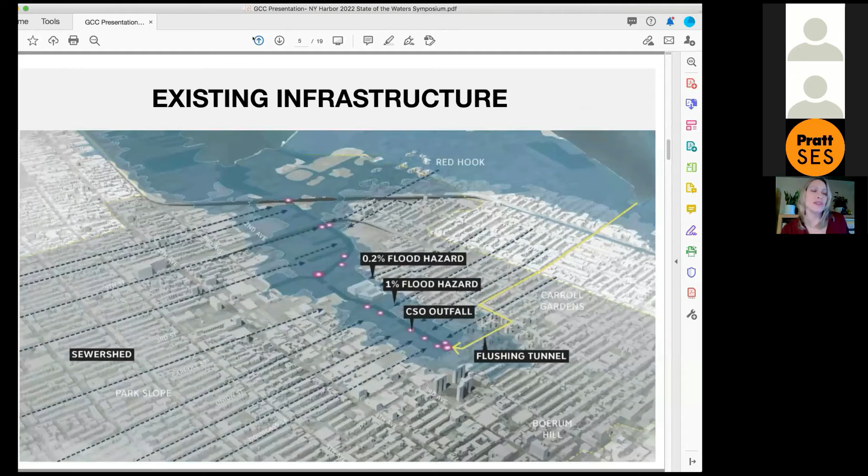Okay, can you see? There you go, yep, we see Gowanus Neighborhood Coalition. All right, I'll just show you these pictures. Darn, okay, this is what I was talking about. Here we are.

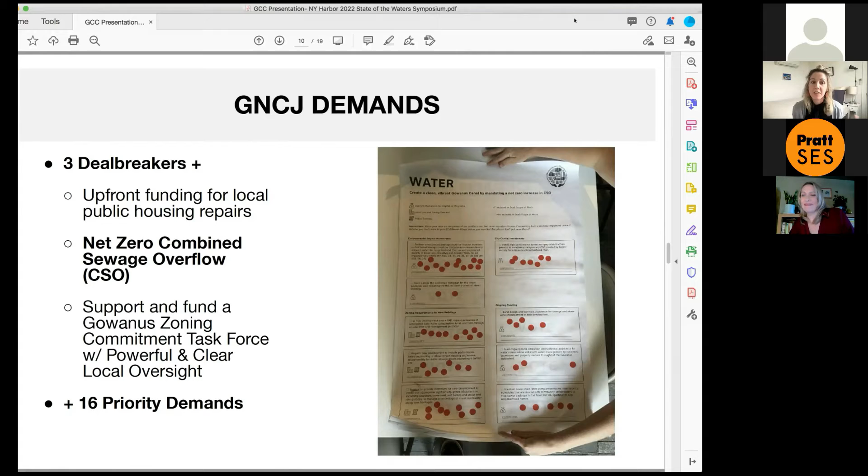All right, so what I was getting to is, through this work with the Gowanus Neighborhood Coalition for Justice, we worked to establish deal breakers as part of the rezoning process. There were 3 deal breakers listed here. Deal breaker number 2, no pun intended, was asking for a net zero CSO situation in the Gowanus Canal.

So at the time we started doing this outreach and advocating for this net zero CSO outcome with agencies, elected officials, and throughout the community, we had many conversations with DEP, who were working on the unified stormwater rule. This was very early in their process as they were establishing the rulemaking, and it became really clear that this rule had a lot of opportunities to help meet this goal of net zero CSO.

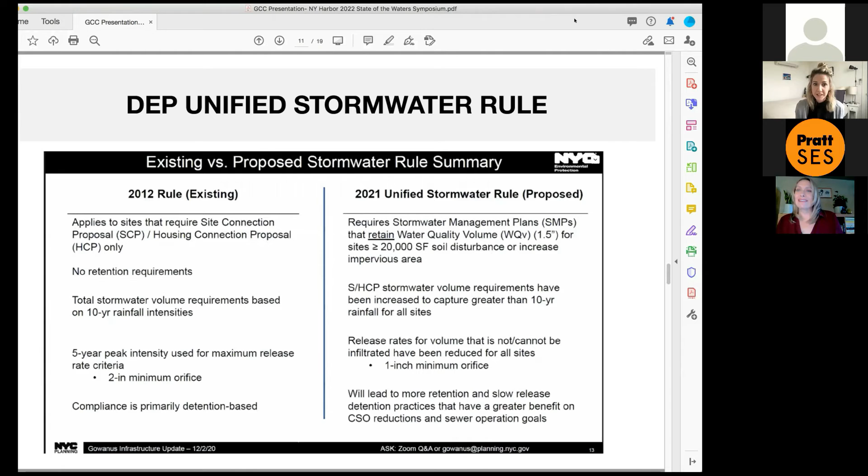Early on, DEP presented the differences between the 2012 performance standard and what the 2021 unified stormwater rule would do. Melissa did a great job covering this, but in a nutshell it's more stringent stormwater requirements, greater capture than the 10-year rainfall, slowing release rates, and an infiltration-first perspective that amounts to more green infrastructure. So we continued this advocacy since 2018 when the Gowanus framework was introduced, through this past November when the Gowanus rezoning was approved.

This involved lots of comments, public testimony, and outreach around net zero CSO. And what we wanted to see DEP do was show us what the unified stormwater rule would look like in Gowanus.

And we wanted this to be a part of the environmental impact statement for the rezoning process. We wanted DEP to report on a net zero CSO outcome, not just overall, but by each individual CSO outfall. So in the draft environmental impact statement, DEP did provide a robust response to our demand, going above and beyond the CEQR requirements, showing a better than net zero CSO outcome.

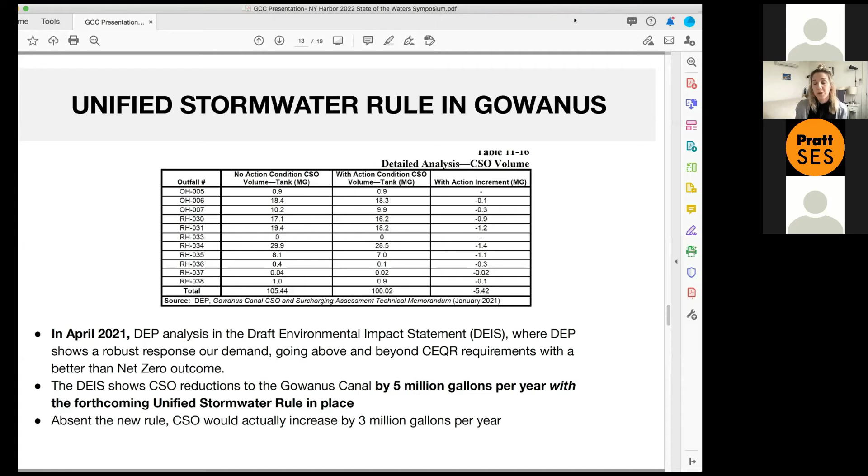Essentially about a 5 million gallon reduction in annual CSO volume. I think it's really important to note here that absent the new rule, with the former performance standard in place, CSO would have actually increased by about 3 million gallons a year. So this new rule is really going to help us achieve this goal.

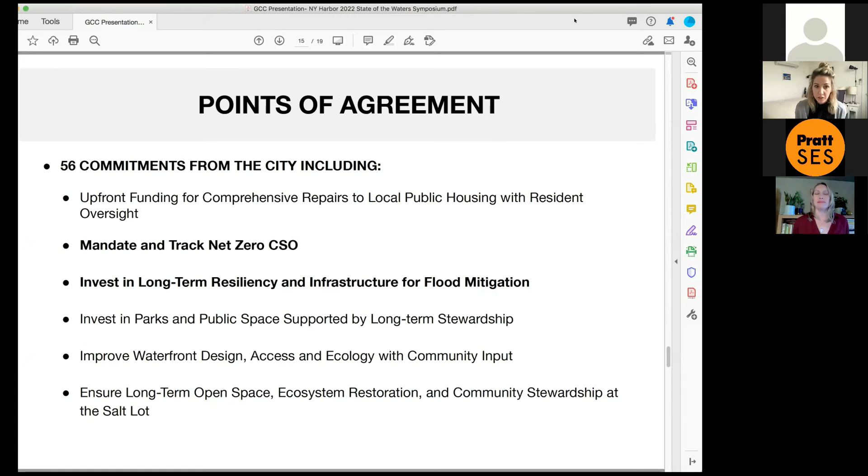So I just wanted to go over the advocacy wins and some of the really nuanced pieces that we think are important. The points of agreement is a document that was established as a consensus document for city commitments through this rezoning process. It includes 56 agreements, commitments from the city to do certain things that help us meet the resiliency and environmental justice goals for this rezoning. Many of them have to do with net zero CSO and long-term resiliency and infrastructure planning for the neighborhood.

Specific to the unified stormwater rule, that's going to help us achieve net zero through more stringent stormwater management requirements, ultimately resulting in a 5 million gallon reduction per year. The critical piece in the points of agreement that I want to note here is that DEP is going to be tracking and reporting on this new rule through both the Green Infrastructure Annual Report, but also in summary for the Gowanus Sewershed.

I think that is something we wanted to establish very early on in this process in order to really understand these modeling and all this complexity with every site development. We needed to sort of have a way of checking the incremental impacts.

Additionally, the infiltration-first hierarchy and the adaptive design standards are something that's really responsive to places like Gowanus, where you have a high water table and a history of contaminated soils. There's more flexibility and innovation inherent in the types of practices that can be applied.

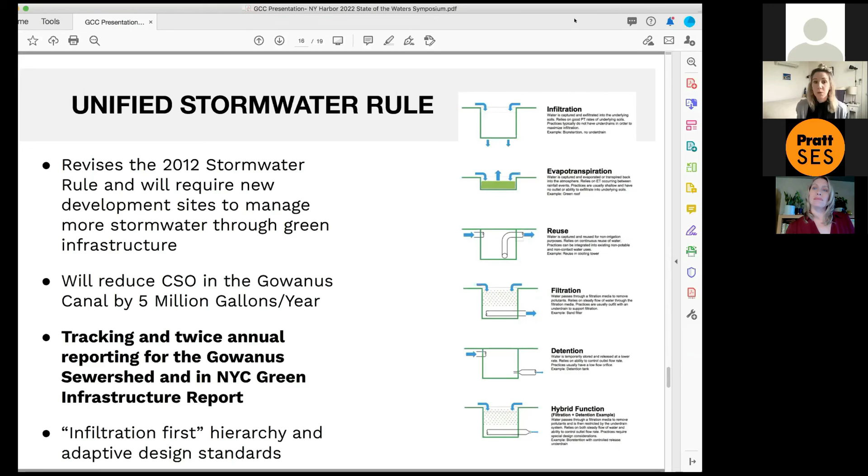And I think that this is kind of where we want to go, in line with our vision towards a more integrated water management perspective for Gowanus, but also thinking about that citywide. That means looking at the hydrologic systems at all parts of the watershed, and thinking about the best practices that can really adapt to a local landscape.

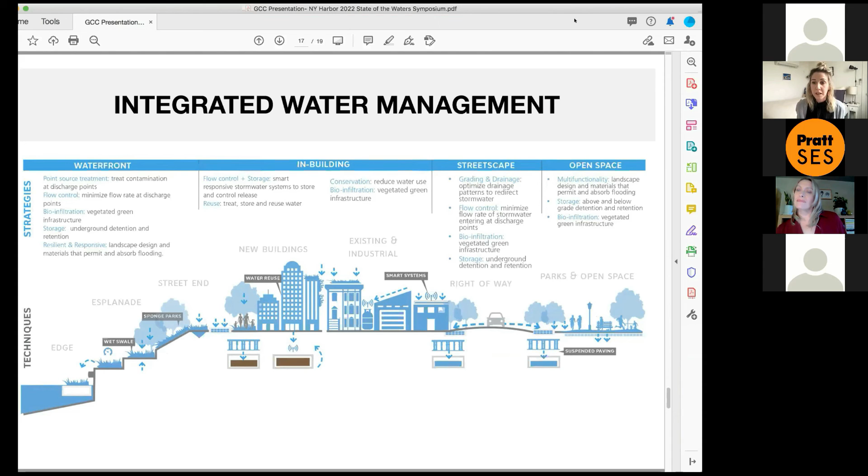I think Melissa went over these really well. Some of those hybrid systems are really going to benefit places like Gowanus, where you have these kind of pre-existing constrained site conditions. A couple other things I want to mention, because the Unified Stormwater Rule is great and it's going to do a lot in terms of meeting our water quality goals. It's a multi-pronged approach that's really going to get us to where we need to be.

And other pieces of the points of agreement are commitments that the city has made to further think about this adaptation that's necessary and planning for the future. One is committing to a cloudburst study, which is going to assess stormwater flow paths in the Gowanus watershed and provide priorities for future infrastructure development, really looking at addressing the hydrology and flood resiliency issues. This is something that the Gowanus community has been asking for many, many years.

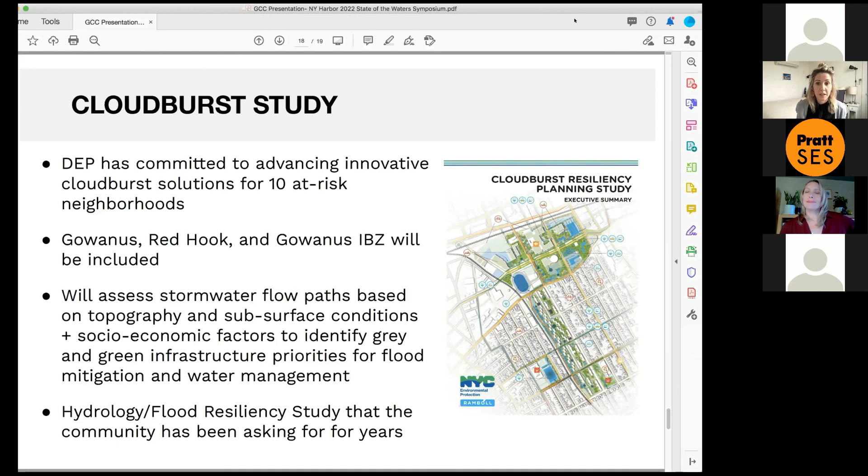And finally, also capital investments: $174 million in upgrades for sewer infrastructure in places that are hit the hardest during extreme weather in Gowanus. I highlight these because I think the Unified Stormwater Rule is a piece, but it's really a broader kind of thinking across the watershed that's going to help move this into the future in the way that we need to.

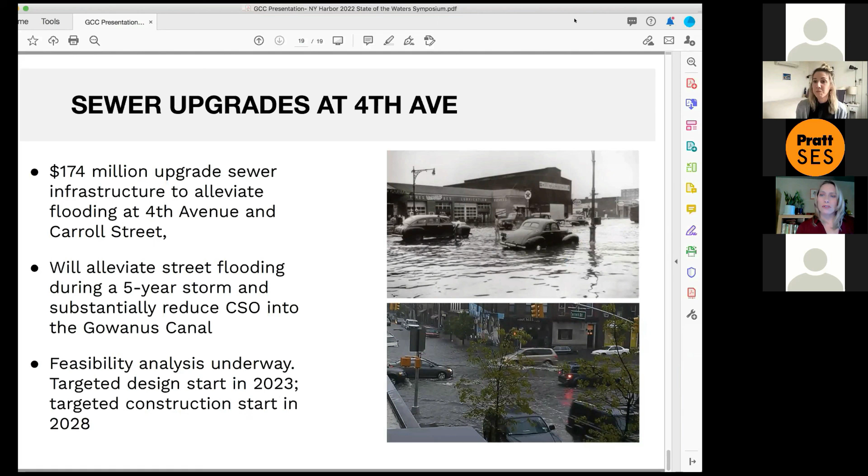So that's what I have today. Apologies for the slide issues.